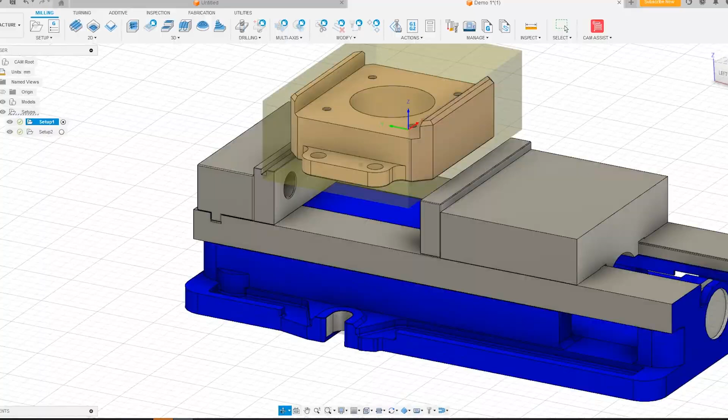So here on screen you can see we have our part. This is going to be a two-part operation where we're going to do everything from one side, flip it, and then do the other side. When we go down to manufacture, that's when we're going to see this Cam Assist button. So, like I said, 80% of the way there with one click.

So we're going to click our magic CloudNC Cam Assist button, and it's going to open this menu. This menu is basically going to set up how we want CloudNC's Cam Assist to program this part. First we have our tool library. Whether you're working in inch or metric, you can choose. Also, you can customize your own library. So essentially the library is where CloudNC's Cam Assist is going to go pull your tooling from.

So whether you have custom tooling that you want to set up, whether you don't use certain kinds of end mills, you know, we don't use bullnose here, we only use ball. So I can go and take them out of there. Maybe I have 3 flute tooling in certain diameters that's not in here. I can add them in. But it's a very good starting spot.

Now, although I'm in Canada, we use inch and imperial for everything. So I'm going to choose inch. Our stock material, aluminum, brass, whatever we want it to be. Today we're going to do aluminum just for sake of expediency.

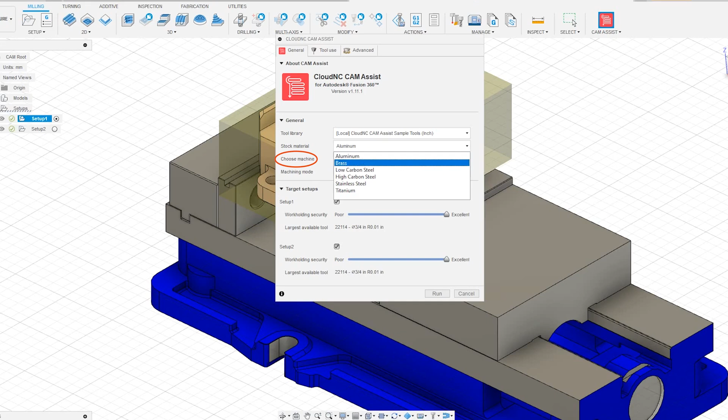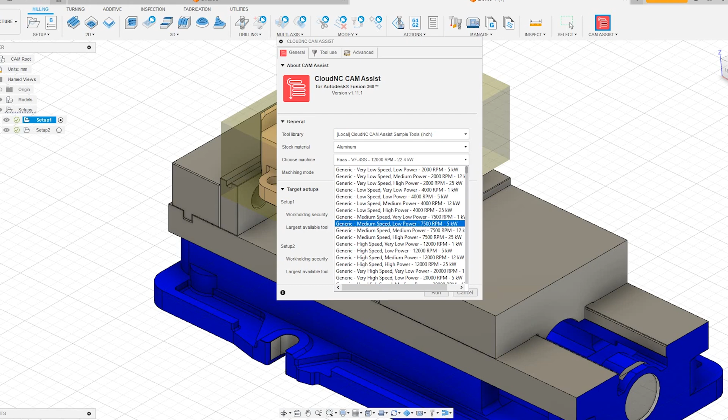And we can choose our machine. So I already have this set up for my Haas VF4SS. But when I go in here, you can see they have pretty much every kind of machine under the sun in here. Let's say that it's not set up in here. My machine, I have some weird one that maybe was a short run or it's a custom machine. I can go and choose some generic options to kind of give it some specs. But we're going to leave it on my VF4SS right now.

Machining mode. So like I mentioned at the top of the video, they have actually released a 3+2 for 5-axis work. I'm not going to use it today because I don't have 3+2 on my machines. We're just going to do 3-axis, but it's a new feature. I highly recommend checking it out. I got to play around with it a little bit, and believe me, it works better than you'd think. But we're going to stick with this one in 3-axis.

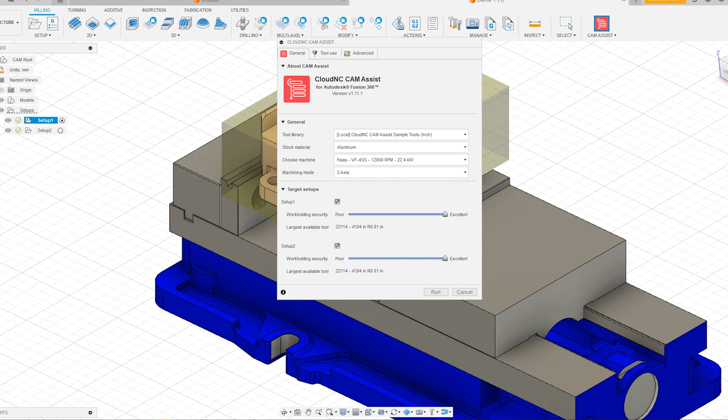Now, the one thing that I often criticize a lot of demo stuff for, you know, when you're at a trade show and you see some part running perfectly, you go, yeah, of course, this is a perfect work holding situation, this is a perfect machining situation. It looks nice, but what's the reality of that? Well, CloudNC thought of that too.

So they have right here in the target setups, work holding security. What that's going to do is, let's say this is excellent - I've pretty much welded this tool to the table, or this workpiece to the table. This is going to use higher feeds, higher speeds, bigger tooling because the workpiece setup can take it. But let's say that maybe I'm not in a position where I can hold it as well. Maybe I'm holding on to only a little bit of the part, or it's a thin-walled piece of extrusion that I'm starting with.

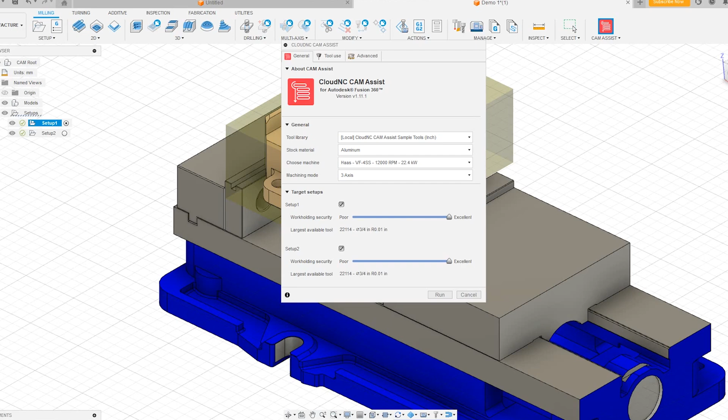I can go and slide this down. What that's going to do, you can see right below here, is drop the diameter of the tooling as one aspect. So it's going to have less force on the tool, or on the workpiece, as it goes. But let's say, for sake of illustration, we've pretty much welded this thing to the table. It's going to use bigger tools, heavier cuts.

So now I go through to my tool use. This goes and pulls your tool library. What I can do here is go through and say, hey, you know what, we actually don't like the 1/8 ball nose we have in-house. I can take this off the list. Maybe I'm waiting on an order of more 0.17 drills. I can take them off the list.

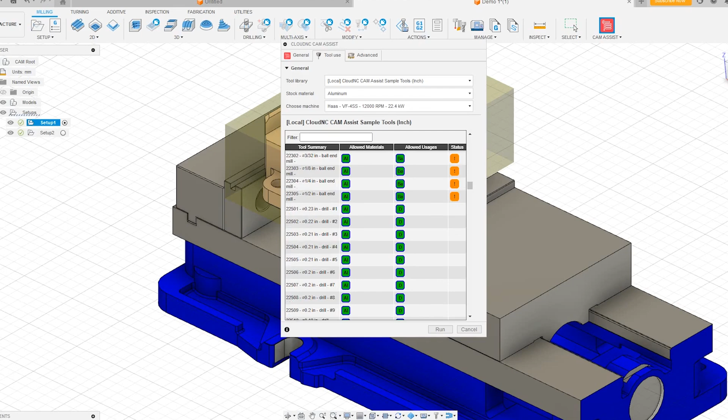Or maybe I can say, you know what, I really wanted to use this tool. I can gray out everything but that tool and prioritize it. Easy peasy. So I go through, now I have advanced. And it's funny because it says advanced.

These are advanced options, but the interface for this is so simple. It's very, very handy. So I can go and say, do I want it to do face milling? Maybe I don't want it to do face milling. I'm already starting with ground stock, perhaps. I can take that off.

Bulk roughing. So, you know, these are our typical roughing toolpaths. Do I want detailed roughing? Do I want it to go in there and take a lot of little cuts out? I can do that too. Deburring, hole making, I can choose all these things here.

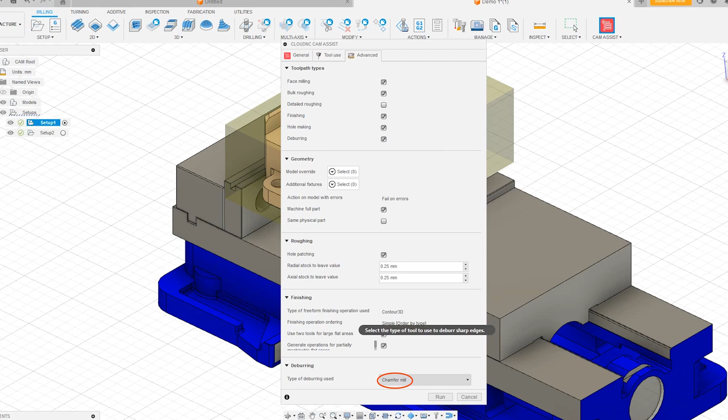And then also, I can go through and say, do you know what, do I want to use a chamfer mill to deburr this, or do I want to use a ball mill? We're going to use a chamfer mill. So I'm going to hit run. Now this is when it's sending this file with all my options out to the cloud. And you're going to be surprised how quick this is.

Now, is it instant? No, but it might as well be. It gives you enough time pretty much to go get a cup of coffee and come back. So it's going to compute all my finishing strategies, all my approaches, and it's going to give them back to me as toolpaths. Now here's the thing, guys. This isn't giving you recommendations. It's going to do it for you.

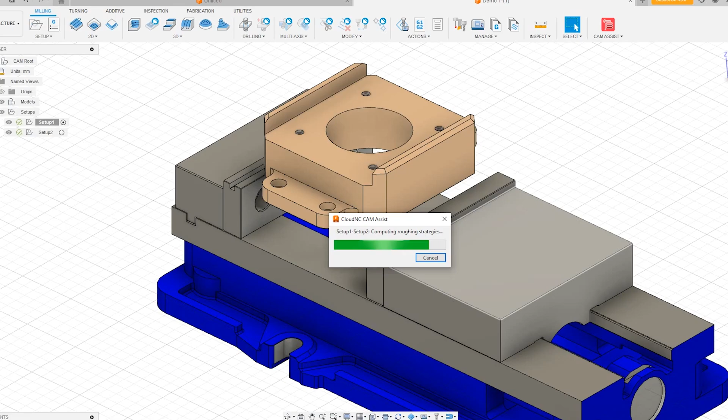Now, you've got to check it. We want to look at it. I don't want to take this, pull it straight out of my computer, put it in a machine, press go, and walk away. That'd be crazy. No matter what, you've got to check your CAM programs. But like it kind of says on the tin, it's going to get you 80% of the way there. There's no value in a programmer going through and having to select 30 holes to drill. It's much easier if they can just put this on there and away it goes.

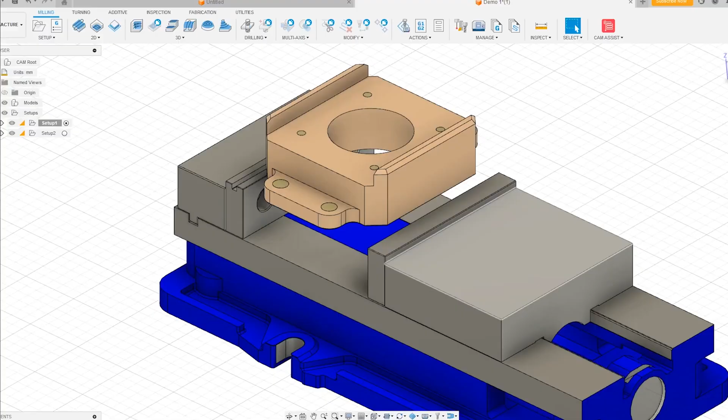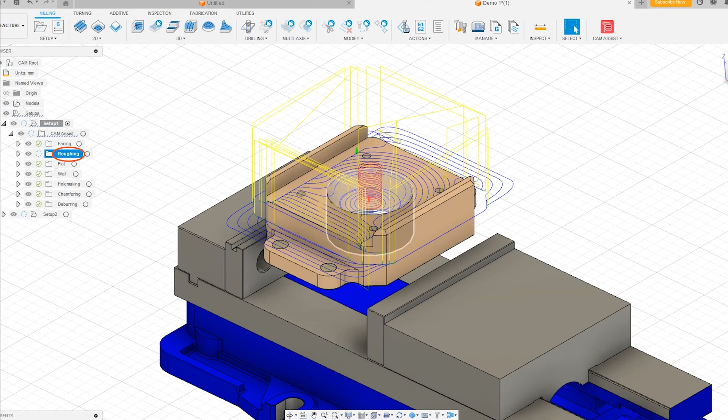So here we are. We now have our setups. So for CAM Assist, we go and click on this here. You can see it's going to export all my toolpaths into this here. So we have our facing toolpath. You can see that's a pretty standard facing toolpath. It's basically just taking the top of the stock off. We have our roughing. This is going to go through and rough out that part. You can see this is basically the way I would program it.

It's very, very similar. If I go to flat, this is going to finish all my flats to make sure that those are coming out in spec. I go to wall. Again, you can see everywhere where there's a flat wall, that's going through and finishing that part for me. Hole making, again, it's going to drill my holes for me. I believe if there's threads in the model, it will actually pick that up and thread them as well, but I'd have to double check that.

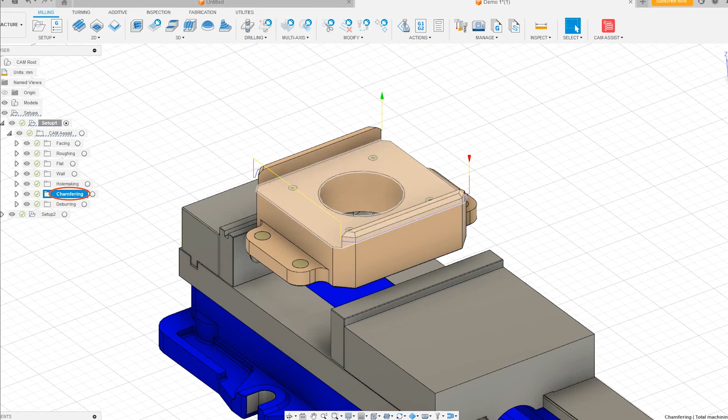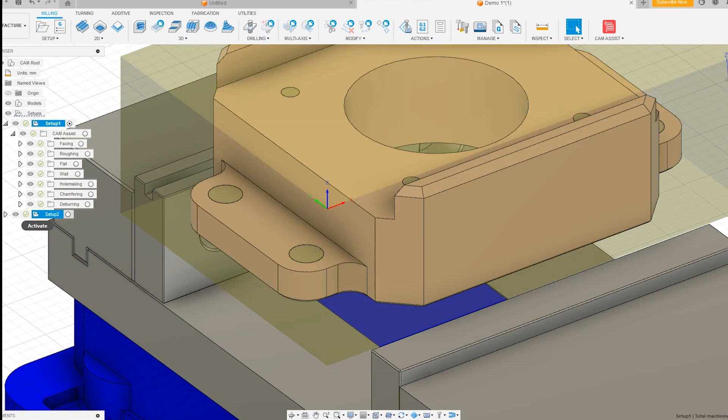Chamfering, you can see it's going to go and chamfer these areas here. It's identified that that is a chamfer, so it chamfers it for you. And then I also have my deburring. So it's going to go through and see everywhere that it can deburr or needs a deburr and deburr it. And you can see it's not going to run that tool right into the wall anywhere, even with those angles where it needs to stop a little short. It's just fine. Now if I go over to my second setup, I need to turn this off and turn this one on. You can see that this is going to finish it off on the other side, but we'll save that for another day.

So what we're going to do is we're actually going to run that program more or less straight into the machine. What I did is I scaled that model to about 50% just because I didn't have a piece of aluminum big enough on the shelf. I reprogrammed it, same thing with that one-touch system. And the only thing I did is I changed one feed. I dropped it a little bit because I was a little nervous. And that's all I did. So we're going to put that straight in my VF2, run that program and see how it comes out. Again, this is straight out of CloudNC's CAM Assist.

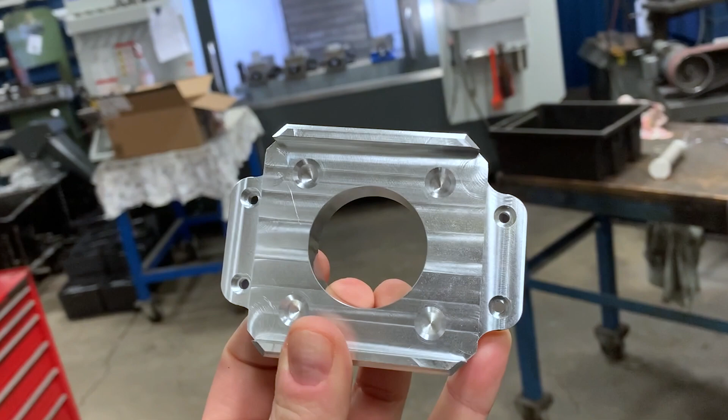So there you have it, guys. Very, very interesting stuff. I'm definitely going to be playing around with it more. As mentioned, we did show it in Fusion, but it is, I believe, in beta for Mastercam at the moment.